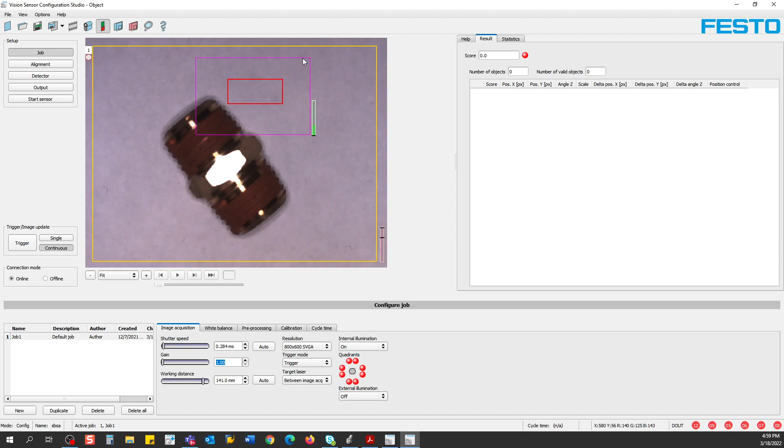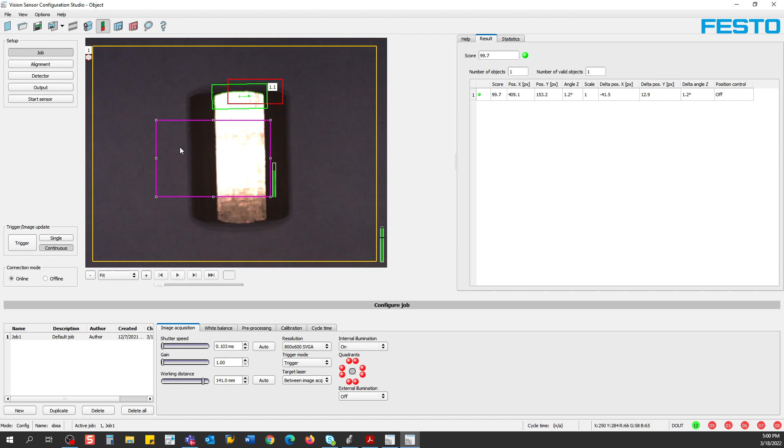But right now our autofocus is looking at this purple area, which isn't necessarily the part that we want to look at. So I'm going to shift it down over here, and I'm actually going to change out the part that I want to use for this. And then I'm going to click the shutter speed again, and there we see our part. And then I'm also going to put this back where I want the focus to be. Hit that again, and then I'm going to autofocus for that, and this should come in a little bit clearer.

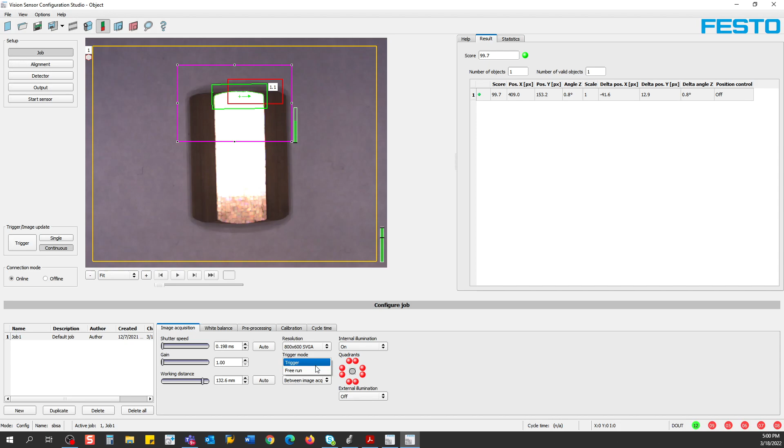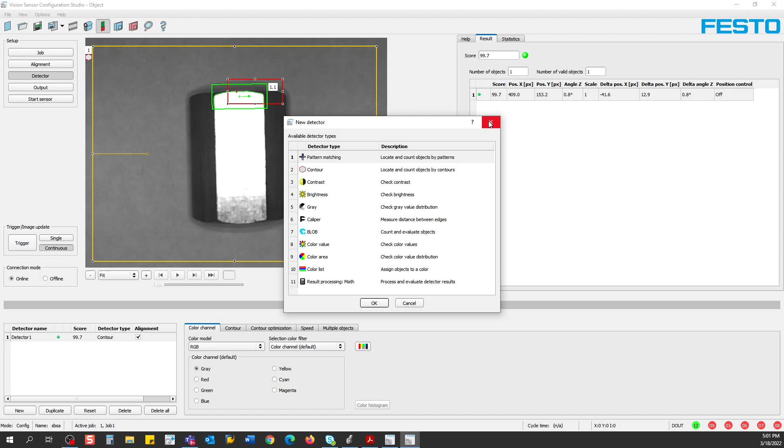All right. From there, we're also going to change our trigger mode from free run to trigger. Alignment we don't necessarily need to worry about right now, and then detector, for purposes of this, we're going to create a new detector just to show you. We're going to click new, and for my detector I just want to do this fairly quickly so we can get to how to connect this to Studio 5000. I selected contour, and then in contour we can select a different color scale. I'm using a grayscale for this.

And this green area is the contour that I selected. I created a threshold for 72 to 100, so that minimizes the amount of error that you're going to find. I also changed the angle range to negative 180 to positive 180, so full 360, so it should be able to find this contour. We can also edit this contour, like we can see this little green spot that we don't necessarily want. I'm going to delete that, and now we're just looking at that arc.

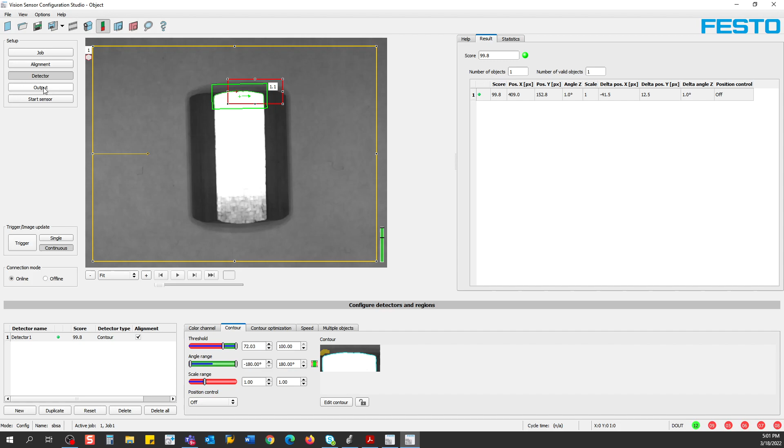So then here we're going to have outputs. We're going to go down here and see Ethernet IP. We're going to hit this check mark, and we're going to make sure that this is a 1 here. And then we're going to go into Telegram, and we are going to need to create a few detectors. First one we're going to need is the overall result.

This helps translate the information to the Rockwell software, and then from there we can put our different detectors. So for here I have a score, a position X, a position Y, a counter pass, and a counter fail.

The next thing we need to take into consideration is the bit depth. This is the size of the data package that is going to go over to the Rockwell software, and we'll need that for setting up our SBS device. We need to take note that our bit depth of 32 bits is the largest, so we'll keep note of that. And then from here, we should be okay. I'm going to exit out of the screen.

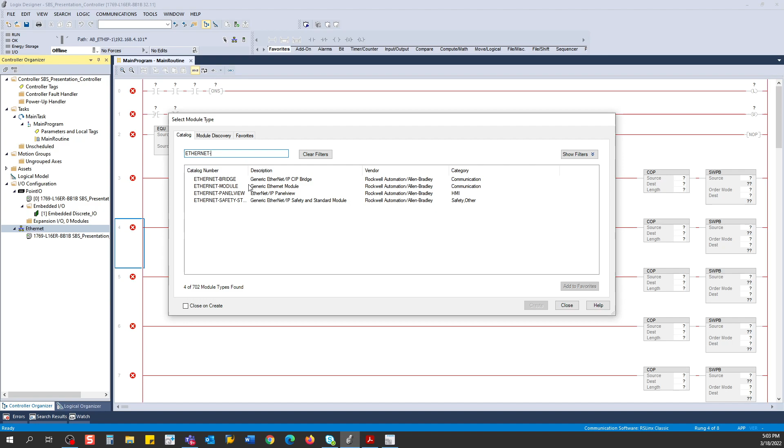And then I'm going to open up our Rockwell Studio 5000. I already have a program sort of pre-written in here, but we'll get to that later. Just did that to save a little bit of time. First off, we're going to go to Ethernet here, and then we're going to import a new module. Here, we're going to type in Ethernet, and then we're going to put dash. This is probably the easiest way to find the generic Ethernet module, and then we're going to create that.

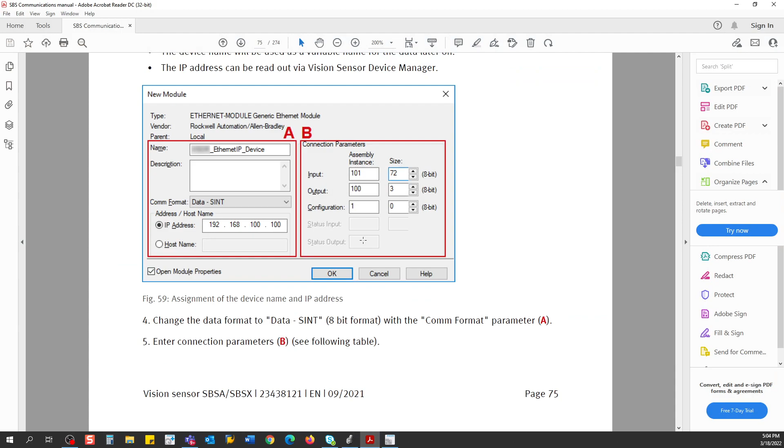I'm just going to call this SBS, and then I'm going to change this from DINT to SINT, and then I'm going to input our IP address. So 192.168.100.100 for you, 4.100 for me. And then we're going to find the assembly instance in the documentation that we pulled up earlier. We're going to scroll down to here, and we're going to find the 32-bit.

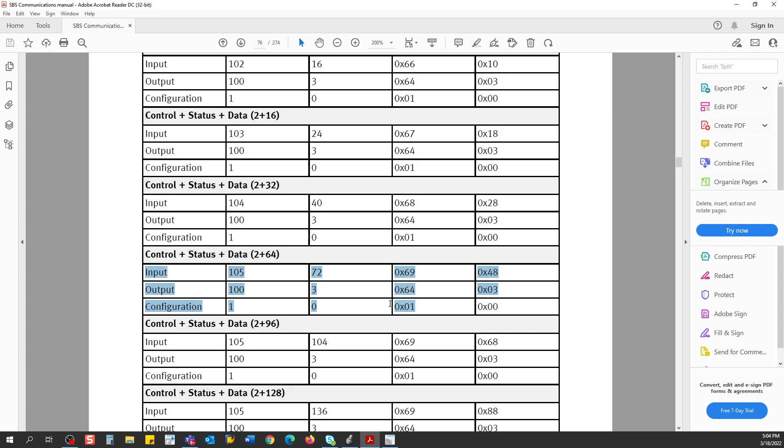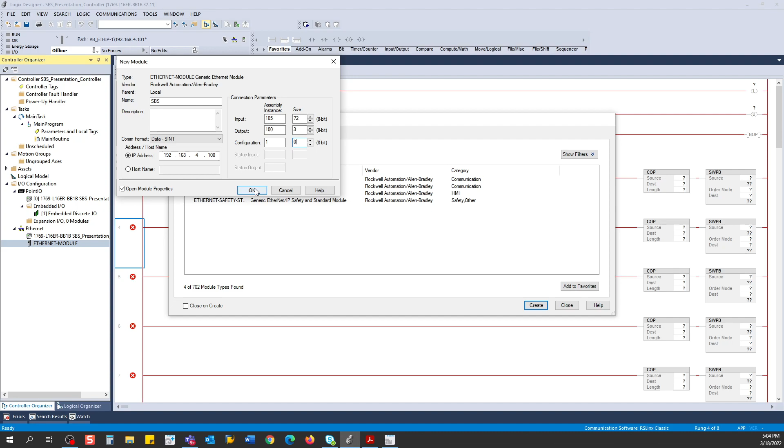I'm going to play around with this a little bit later, so I'm actually going to go a little bit higher than 32, up to the 64-bit, but you are more than welcome just to use the 32-bit. So these are the inputs that I'm going to put into that screen, which are 105, tab, 72, tab, tab, 3, tab, 1, tab, 0. And this should be all connected. So we'll click OK there. We'll exit it. We'll click OK here.

And then from here, we're going to start creating some local tags. You can take a quick look at this and the quick logic that we have to see what we're doing here. So here, I'm going to create a tag, X trigger button, and we're going to use a bool. We'll create that. Here, we'll do tag X ready, and we're going to have this an alias for a different one. So we'll go SBS input, and then data 0-0.

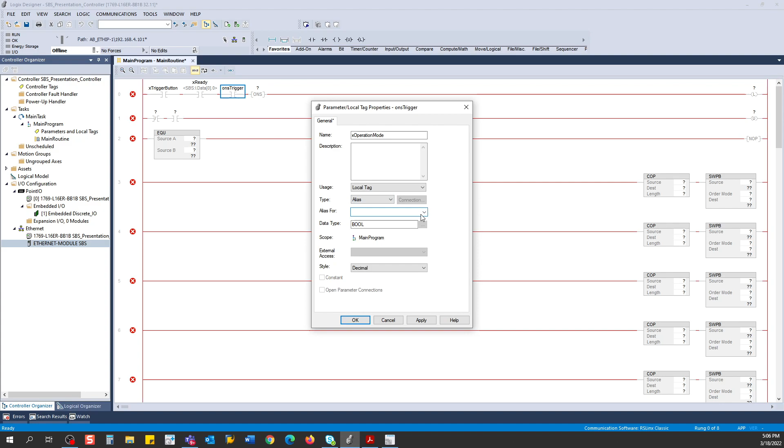All right, great. Next one, ONS trigger. This is also going to be a bool, so we'll just create this. Oh, that was the wrong one. Edit. This is X operation mode, and this is also an alias for input data 5, 6. Okay, now this one is ONS bool, ONS trigger.

And then our output, new tag, X trigger, and this will also be an alias. 0, 2. And these inputs and outputs can be found in the user manual that we just dug up. And then we'll create that. And we'll go on to the next one, which will just be the X trigger button.

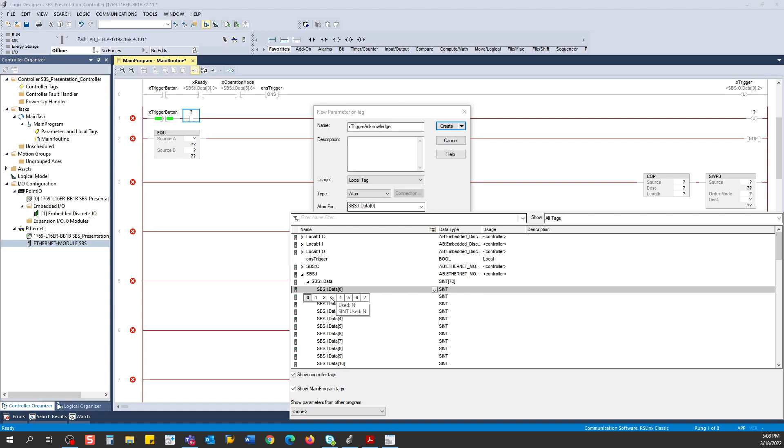New tag for the one after that, which will be X trigger acknowledge. And that will be input for the output. 0, 2. Create that. And then this is just the X trigger from before.

All right, source A will be an input point. And then we'll go to input, SBS data, and then we're just going to select 0. Source B. We're going to create a new tag, call that overall, and we're going to change this to SINT.

And create that. So our bits 0 through 8 are all delegated to communication, and then our inputs coming into the software are going to be all the bits after that. So when we are looking at the source for our sensors, we're going to be starting with bit number 9, and we're going to see that right here. Also, the sources that we're going to be using here are going to come in the same order that we set them up in our device, as we see in the communication.

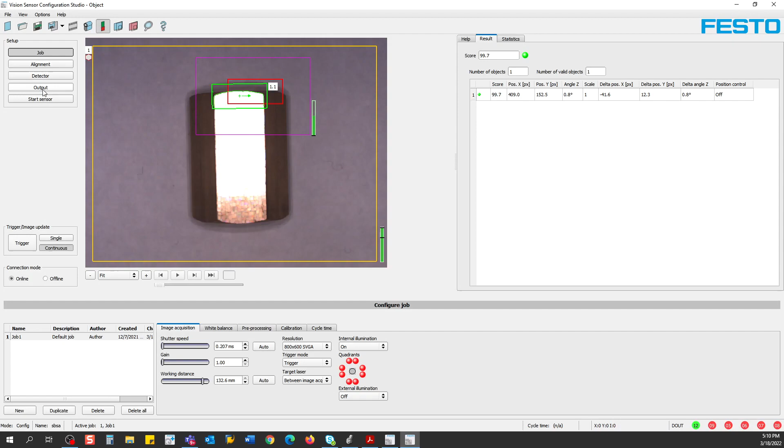So if we go to output and we look at our telegram, the first one that's going to pop up is score, second one's going to be position X, the third one's going to be position Y, then counter, and then fail. Go back to that. And I'm going to set that up here, and we're going to go starting with input data number 9. And then each input is about 4 bits large, so our length is going to be 4 for each of these.

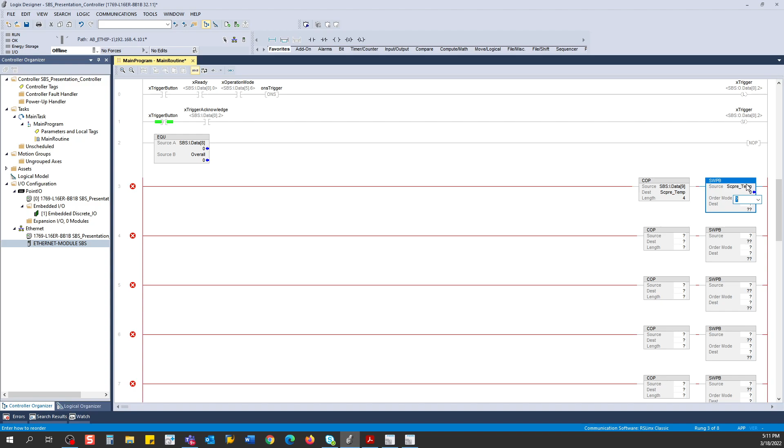And our destination will be a new tag, and we'll go score temp. I'll create that. And then here we'll go score temp, order reverse, destination score. And then we'll create a new tag. Create. And then here, since we have a bit depth of 4, we're going to go from 9 to 13.

Destination, position X temp, length 4, and then we'll create that. Position X temp, reverse, destination, position X, and then we'll create that. Next one, 13, 17.

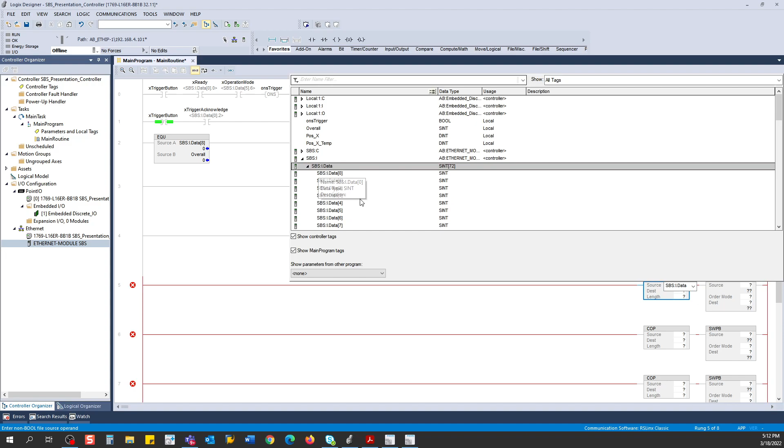Destination, position Y temp. Four. And then we'll create that new. And then reverse, and then position Y, and we'll create that tag. Source 17, then 21.

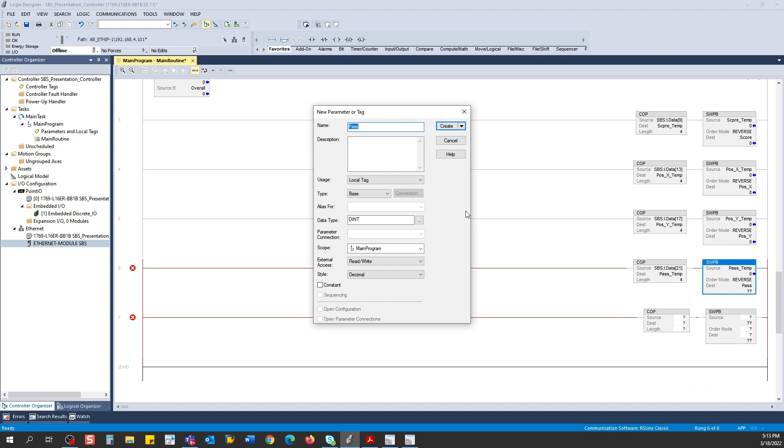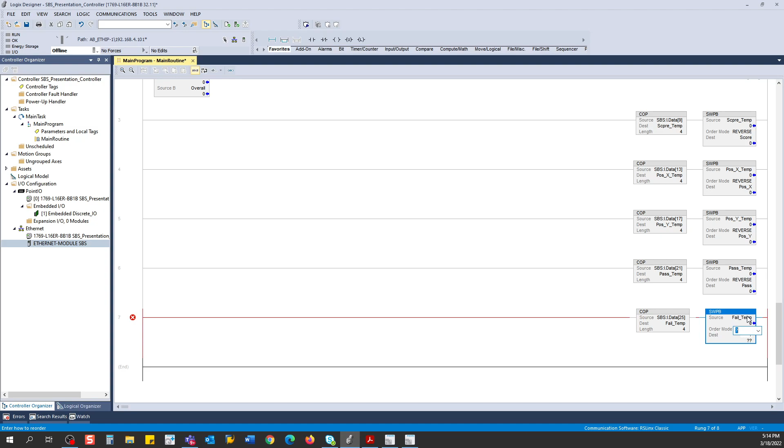Destination, we'll go to pass temp. Size 4, enter, create new. And then we'll create that as well. And our final one will be the fail, which is 21, now going to 25. Destination, fail temp, size 4, create new, and then we'll go to fail temp, order mode reverse, and then destination fail.

So we have our system created. We have our connection to our SBS module. So from here, we're just going to create a path to our PLC and download this to our PLC and run it. So communications, Who Active. Takes a moment. We're going to set our project path to our PLC, and we're going to go online.

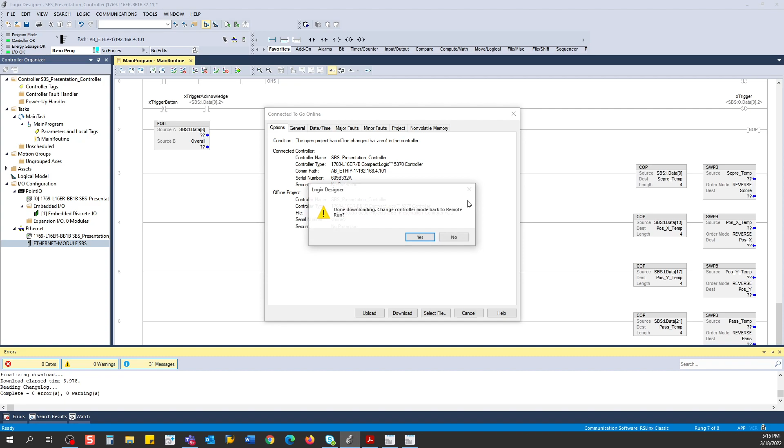So first thing we should check is to see if our Ethernet module is running. So click that, and we have a status of running. So our numbers are good here, and we're going to click OK for that. We are in remote run mode. So from here, I currently have my software open, so I'm going to have to click Start Sensor. If you didn't have this window open, you should be able to go online with your sensor without having the software running.

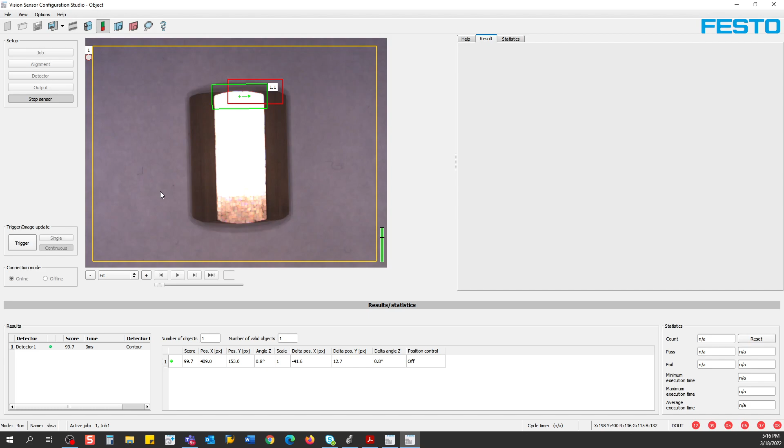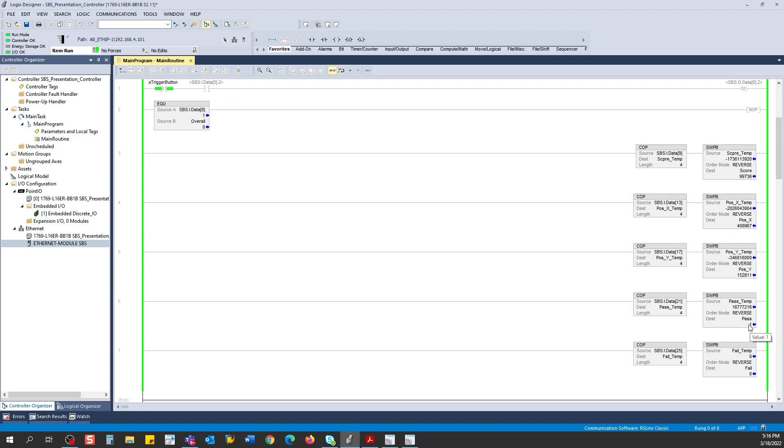And then from here, I'm going to hit that trigger button, and we should be able to get some data. And yes, we have some data. We have a score of 99.7%, our position X, our position Y. We have a pass, which makes sense. And then we also captured a new image of our piece. And we also can see the counter here as well. And we can also see the score. We can see the position in pixels.

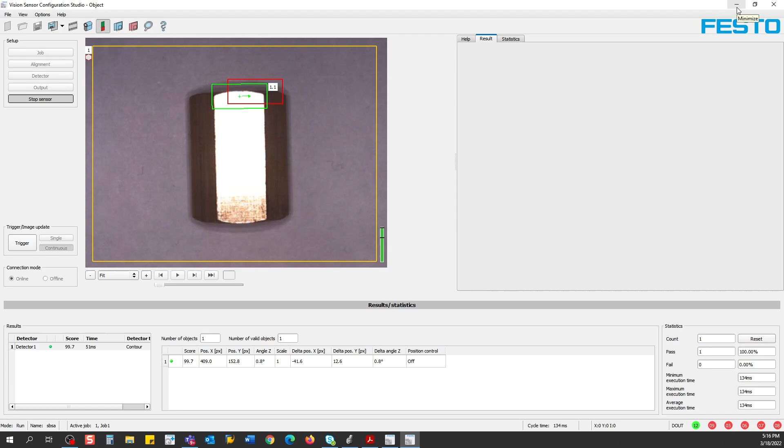And yeah, so I'm going to move the part around and take more pictures and see what kind of results we're going to get. I'm going to show off my hardware. In the lower left hand corner, you can see my current setup. I have a brass fitting, I have my PLC, and I have the SBS sensor. I'm going to move the brass fitting a little bit, and then I'm going to trigger our device again.

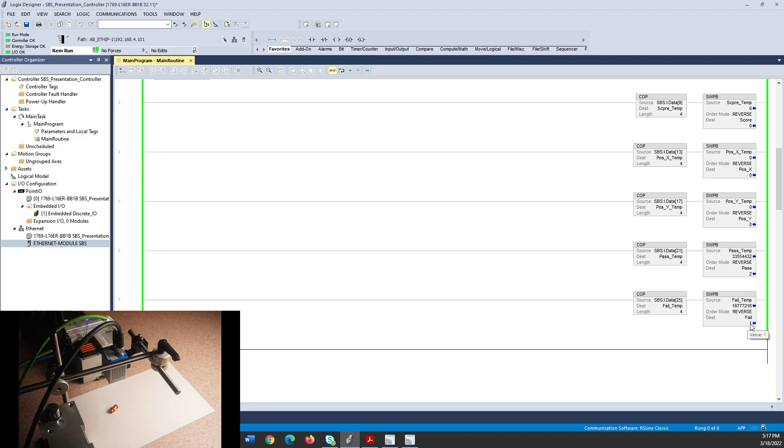And from there, we have a second pass, we have a new score, we have a new X position. And then from here I'm going to try to get a fail, so I'm going to completely switch out the piece for a new piece that does not look like our previous piece. And I'm going to trigger again. And we have our first fail as expected. We also have a new image. Clearly that is not the piece that we've been working with.

So our communication has been set up with our SBS sensor and Rockwell Studio 5000, and I hope this helps